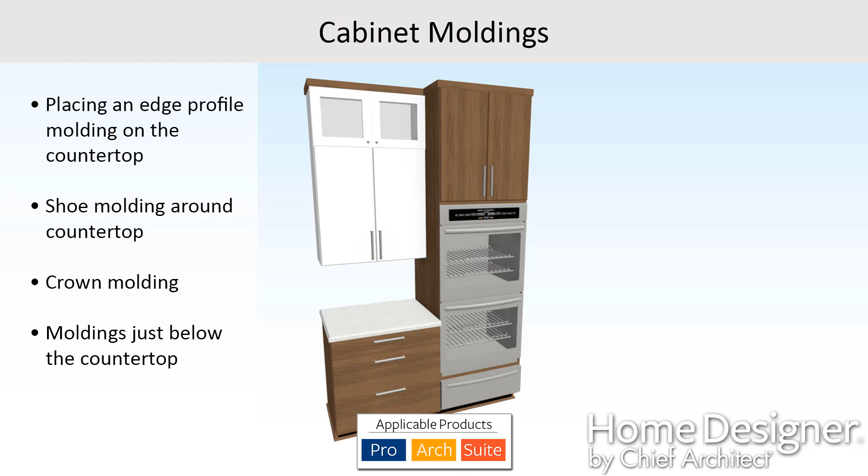Let's go in and take a look at the process. To place a molding on a cabinet, you can double-click and open up the cabinet. You'll find a molding panel. If you don't have a molding already, you can use Add New. If you do have a molding, you can always replace one. Let's click Add New, browse out to the library, and you'll find inside our architectural library moldings for base, chair, crown, door, and edge moldings.

In this case, for the top of the cabinet, I'm just going to choose a simple profile that's rectangular. I'll set the width at 1/2 inch, and the height at 2 inches, and notice there's a vertical offset. Let's use the wheel on the mouse to scroll in and see where the molding is. Let's use the vertical offset - a negative number will raise it off the box, a positive number moves it down onto the box. If you have that situation, you may want to add a blank item above your door so you have space for that molding to protrude onto the cabinet.

Now you can add multiple moldings on the cabinet. If I want to add a light rail down on the bottom of the cabinet, you can use the Add New button. I'm going to select the same profile, and in this case set it to be 1.5 inches, and the vertical offset will remove from the top. We'll use a negative number to move it off the box, the same distance, and then we can close the dialog and preview where those moldings are.

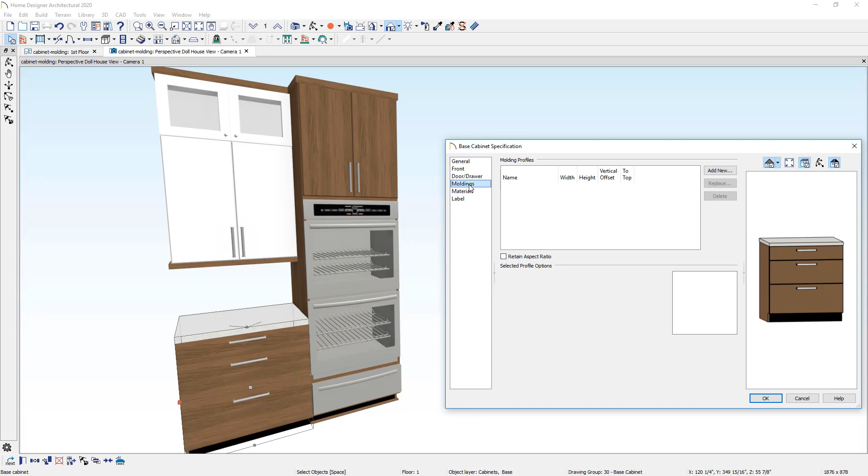Let's take a look at the base cabinet. On the base cabinet, I'm going to go onto the molding profile. The first thing I want to do is add an edge profile for the countertop. I'll come over to the Add New button. You'll find edge profiles in our core catalog underneath the architectural folder, Edge Profiles. You'll also find a bonus library in our 3D library system that you can download, which gives you a larger selection. I'm going to select the Ogee profile, and that will apply it onto the cabinet box. Again, you can control the height - in this case I'm going to make sure it's the same thickness as the countertop at 1.5 inches.

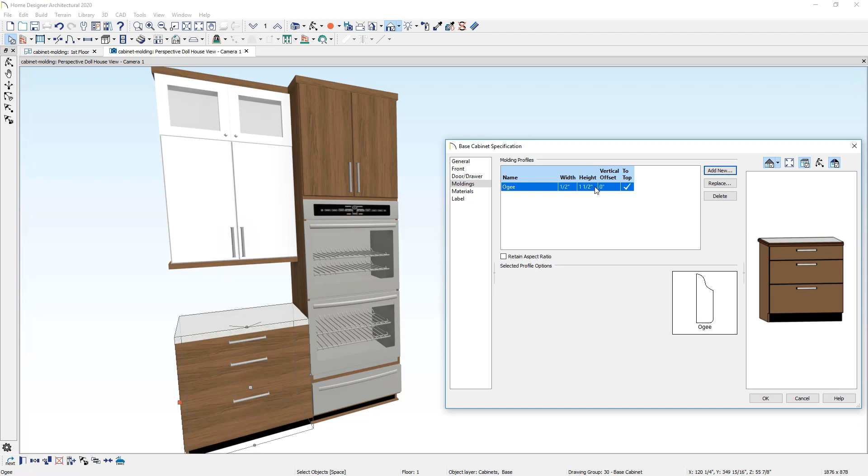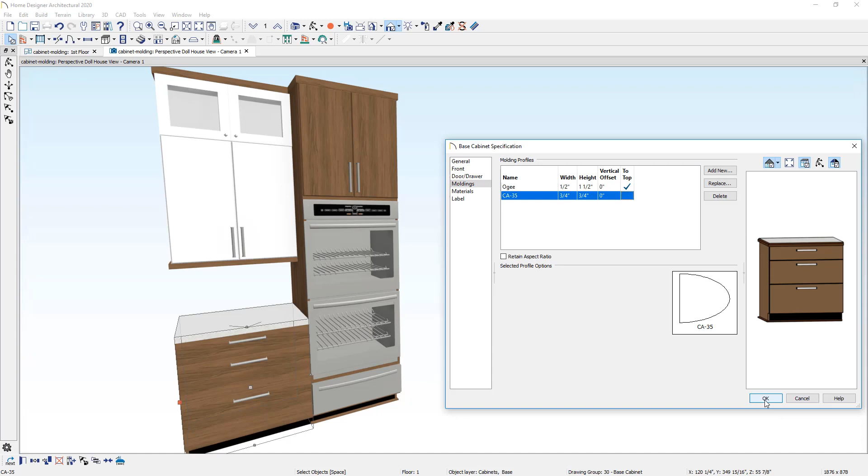And then I want to add a shoe molding. You'll notice there's a shoe molding on the full height cabinet. Let's go back in and Add New, and in this case I'm going to select the simple edge profile molding that's 1/4 round. I'll set the height to be 3/4 of an inch, and again from the bottom of the cabinet you see the preview of it. Let's close the dialog. You'll notice that the moldings actually bump and merge here on the bottom as well as here on the top.

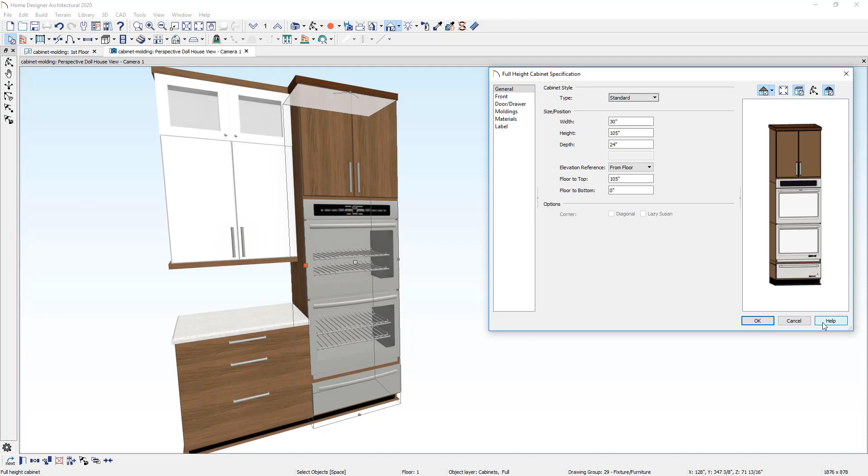You can also use the material eyedropper. If I pick up the countertop material, I can spray that on the edge profile and it will apply it to that molding. To learn more about moldings, make sure you open up the cabinet dialog, go to the Help function. This will open up the help file directly into the cabinet dialog, and you can scroll down to learn more about moldings and information on how they can be applied to your cabinets.